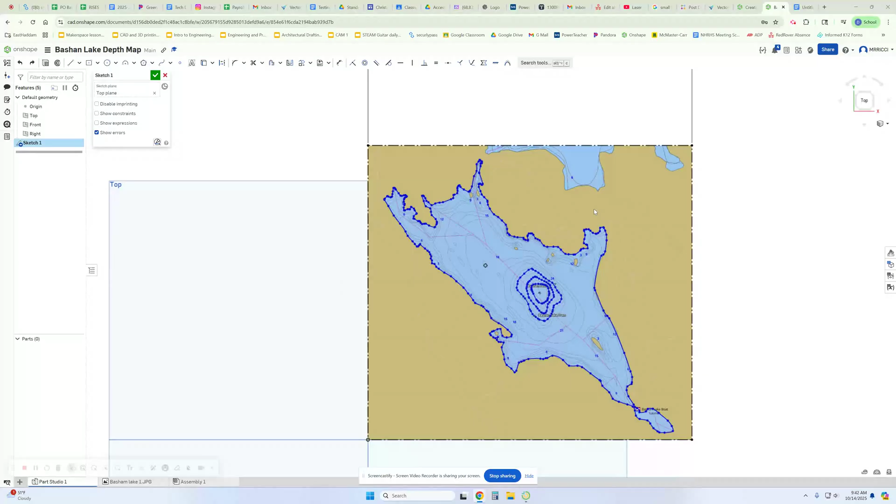But now for this video I'm going to show you how to turn this bathymetric lake map into an actual depth map, so that we have each depth on its own separate sheet of material, and then make sure they're all centered so they all line up like they're supposed to.

Alright, so what I did here is I traced the outside spline and I traced a few of the inside contours. You'll have to finish yours obviously, but I'm just trying to save a little bit of time, so I didn't do all of them.

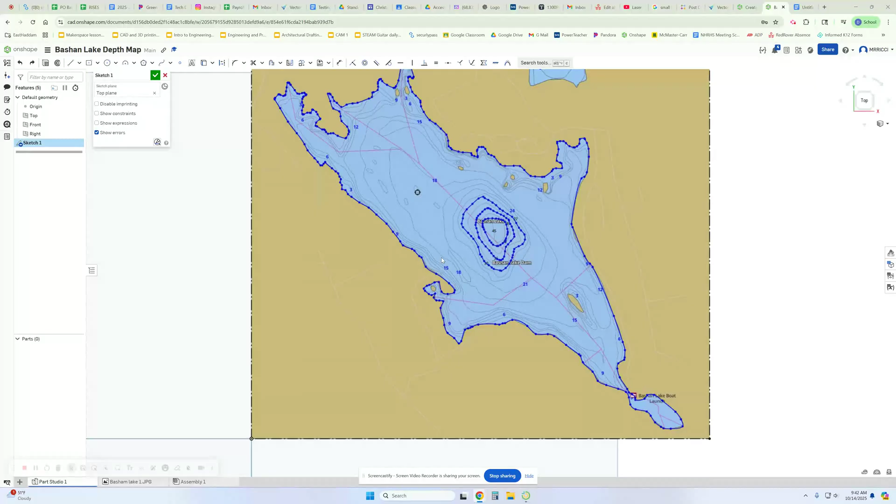But pick a certain depth that you want to go with, every 8, every 9, every 12, every 15, every 20 feet, depending on how deep your lake is.

And then you roughly want to be about 6 layers on this, so a bottom layer and then 5 or so upper layers. Make sure you don't have too many layers so we don't use too much material. So limit yourself to about 6 pieces of material. That'll come into play more, and I'll explain more about that in a little bit.

But what we want to do here is we want to first start by taking this map and scaling it correctly to our size. Our size for our material that I'm going to give you is 12 by 15 inches, and so I'm going to draw that here.

I'm going to take and click - oop, that's my center point. I want to do that - corner rectangle, and I want to draw that 12 by 15.

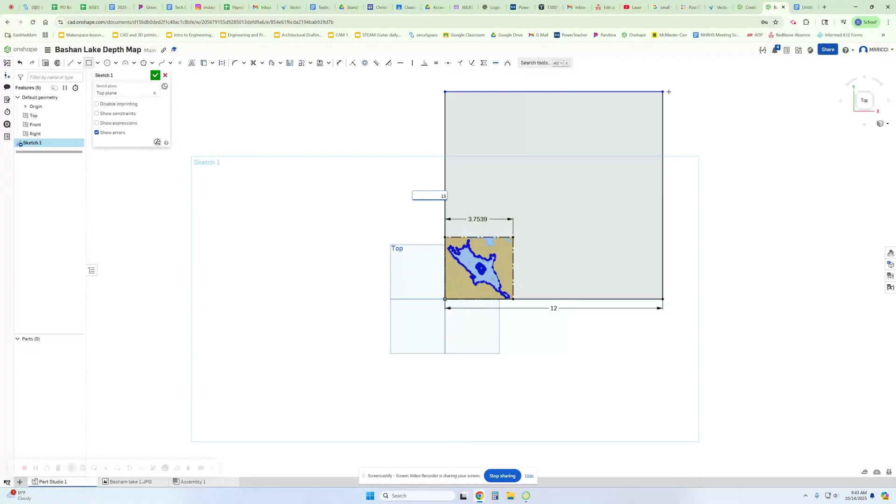So this is the size stock I'm giving you, but I don't want to make it to the exact extents of this stock. I want to make it a little bit smaller so that I can have a nice clean laser cut outline going around this.

And so I'm going to draw a line down the center, and then I'm going to click my center point rectangle so I can center a rectangle in this rectangle.

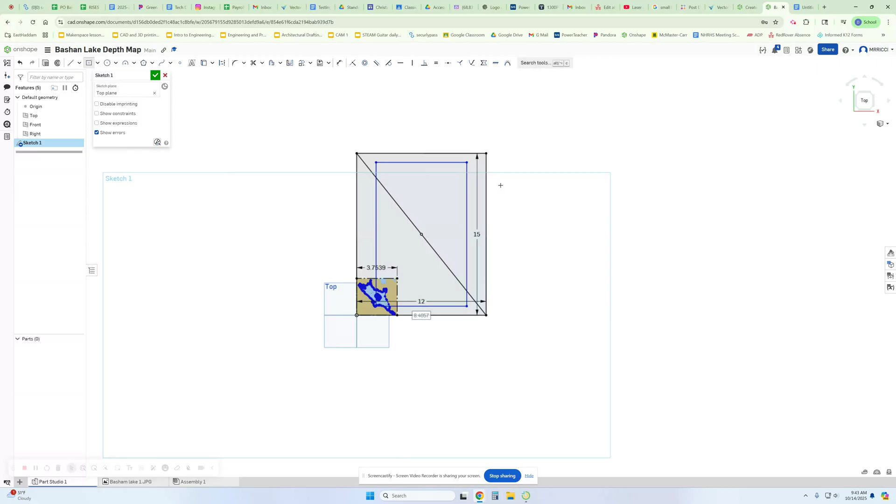This second rectangle is going to be 14.5 by 11.5. You can do whatever orientation you want. I'm choosing to go portrait here just because that's the way that I want this to go.

You do not need to use the full 11.5 by 14.5. You can make it smaller, but you can't make it any larger. This is the max, okay.

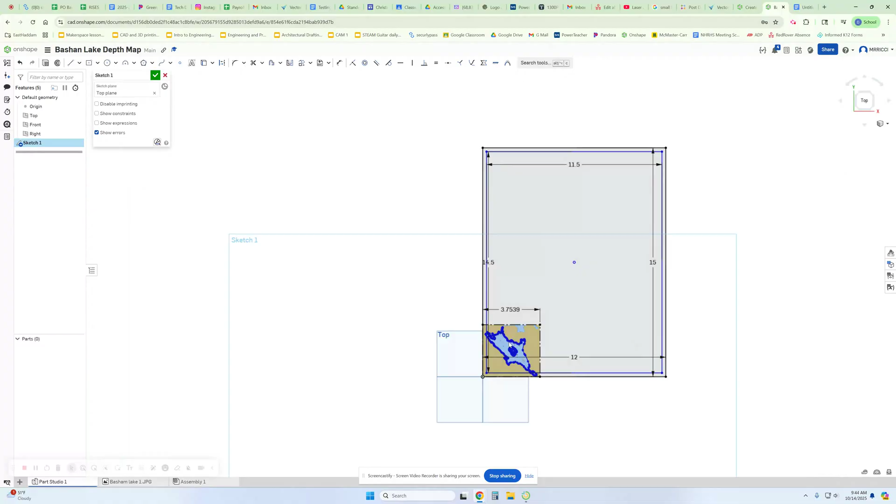I'm then going to delete this diagonal line. Next thing I want to do is I want to move this map to the inside of my stock here. So I'm going to take and drag the splines and the map up to this point, and to do that I'm going to use the transform command, which is in the linear patterns drop down.

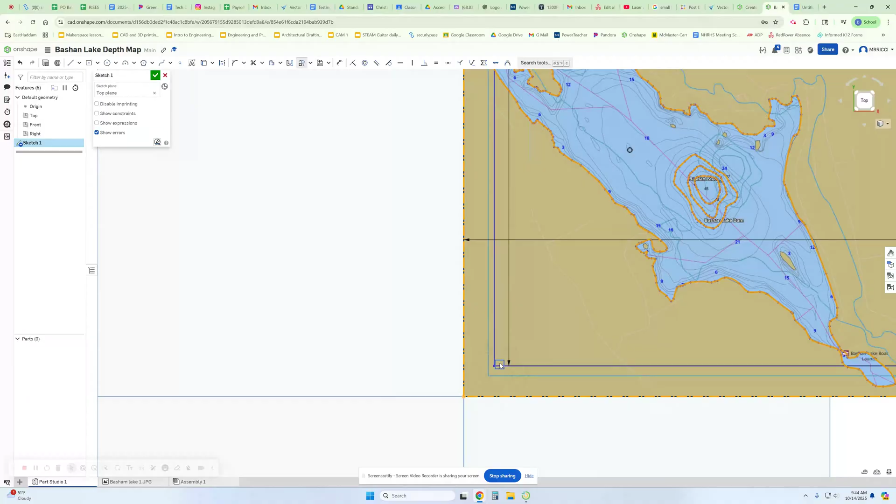So selecting transform, grabbing all the stuff I want to move, and then the transform will give you these options here to scale and to move. I'm going to take and grab this box here and just slide it to snap into this corner. And then once I click, it will move everything with the map and the splines.

Okay, I want to make this 3.7539 - I want to make that exactly 11.5 inches, so I need to figure out a ratio, exactly how much to scale this up.

Alright, so I wrote the ratio out here. It's 3.75387 over 1, because right now it's full size, so it's full scale. And I want to figure out how big to make it if it's 11.5 inches, so I'm solving for x. So cross multiply: 1 times 11.5, divided by our size here.

And so I'm going to get my calculator. So 11.5 times 1 is 11.5. And now I want to divide by 3.75387, and that equals 3.0635. Okay, so that's what I'm going to use for my scaling up, 3.0635.

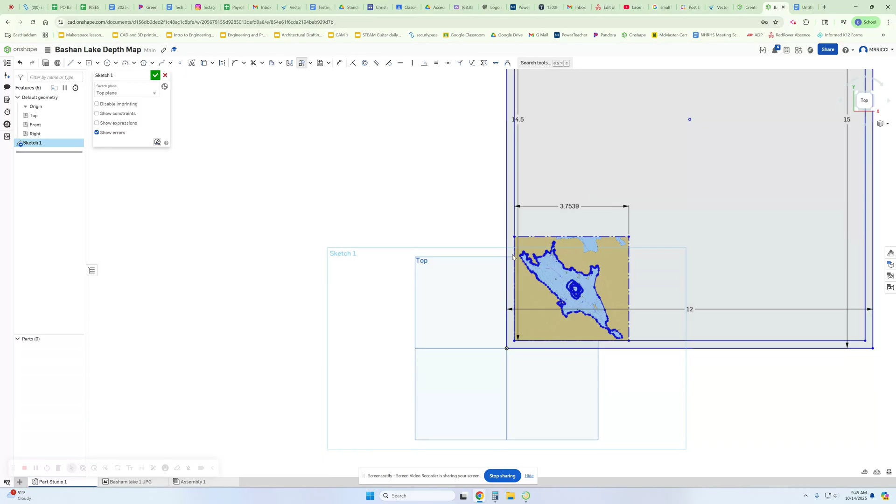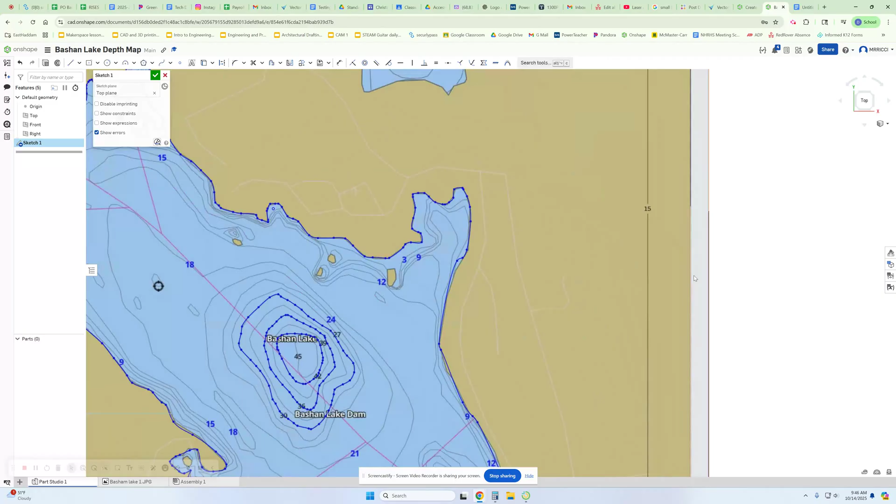So now when I'm doing the scaling up, I'm going to use the transform command again. I'm going to start scaling it by dragging this out, then click in here. 3.0635 is my size. Hit enter, click, and it moves the map to that size, making it exactly 11.5 inches.

I think what I'll do is keep this size and keep the map this size, and just add a label like Bashan Lake, East Haddam, Connecticut. So I want to move this up now, so I have room at the top and room at the bottom for my text.

Okay, another transform. I take and grab this - may have to deselect. I can type in an exact amount I want to move it, or I can eyeball it. I've got enough room up here to write Bashan Lake and enough room down here to write East Haddam, Connecticut, so I'll say okay to that. I'll move it up exactly 2 inches, so it's not just random. Okay, move it up 2 inches, say okay. And now it's moved in here.

I don't really need this map anymore. If I was done tracing it, I wouldn't need the map, so I'll delete that map out of there. Okay, so this is all we're going to need. I'll get rid of this line as well and redraw it down here.

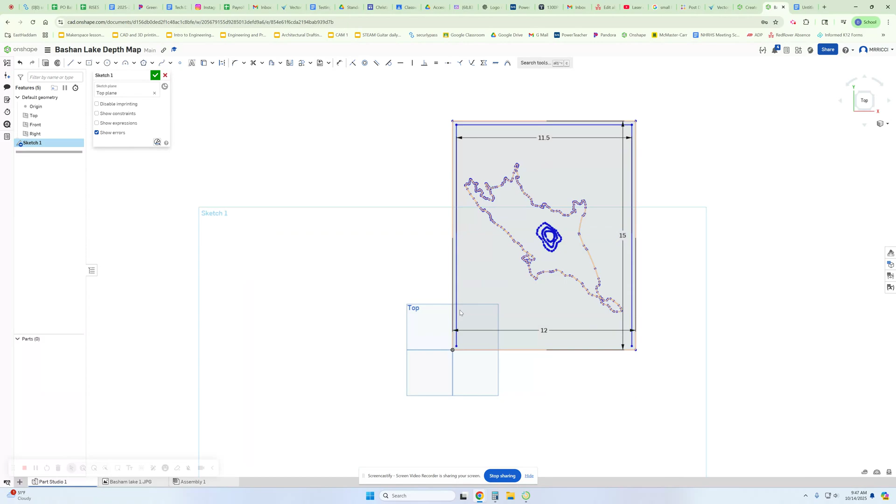Alright, so basically our outside box is our stock, our inside box is the actual size we're going to make this, and then I have my map here. So what you need to do is make a copy of this, of all of this, for every layer.

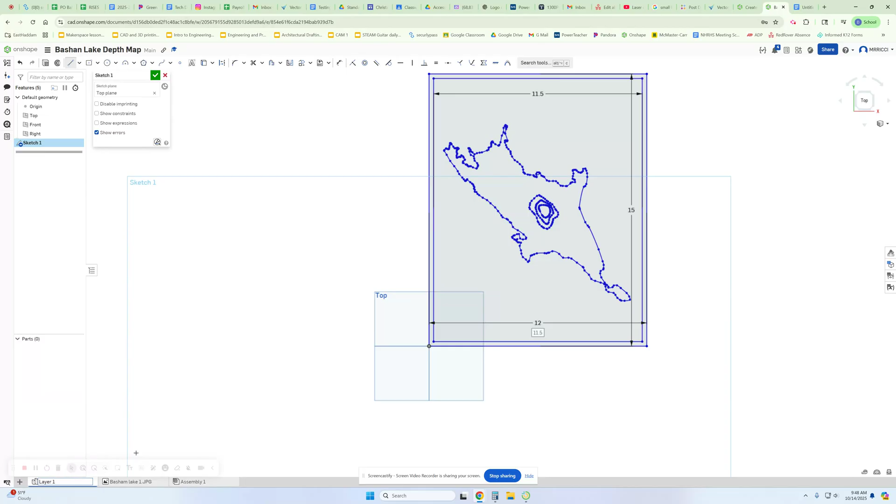The way I'm going to do that is come down here to Part Studio 1, rename it, and call it Layer 1. Then I want to right click on here and duplicate, which makes Layer 1 copy 1. I'm going to duplicate that again, and just keep going through here, duplicating this for every copy I need, and then go back and rename them.

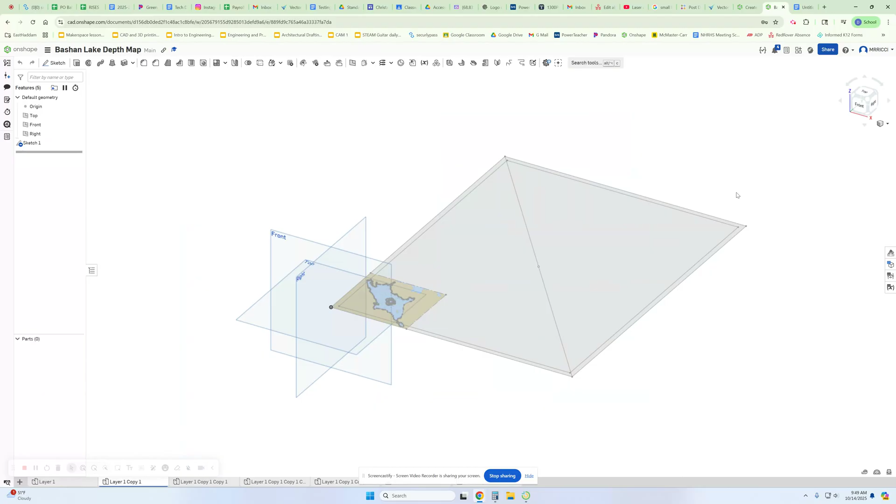Okay, so Layer 1 is this, Layer 2. What I think I have to do is say okay to that sketch. And now if I go here - I didn't make a copy of it because I copied it before I approved the sketch. Okay, so live and learn.

So I'm going to delete these. Let's just do a check here - duplicate this. Yeah, that's better. So make sure you approve the sketch, say okay before you make your copies. So I've got to go here and delete all these extra copies.

Just the little things. Now I'm going to duplicate these for each one. Doesn't matter which ones you duplicate because they're all exactly the same - I'm just clicking on any of them here and duplicating them. So now if I go back through and check any of these layers, they're all exactly the same.

So Layer 1 will be the bottom layer. On the bottom layer, the only thing I need is an engraving of this bottom piece. So I'll go into the sketch and delete everything I don't need.

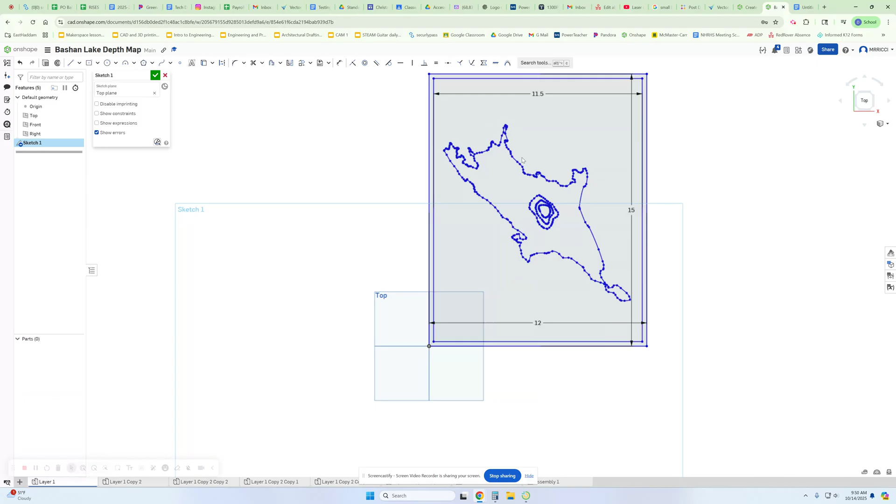So clicking on this spline and deleting it. There it is - click on the spline, delete it. Click on the spline, delete it. Click on the spline and delete it. Okay, so that's going to cut this out, and it's going to cut this part out, so you're going to see through to the bottom layer.

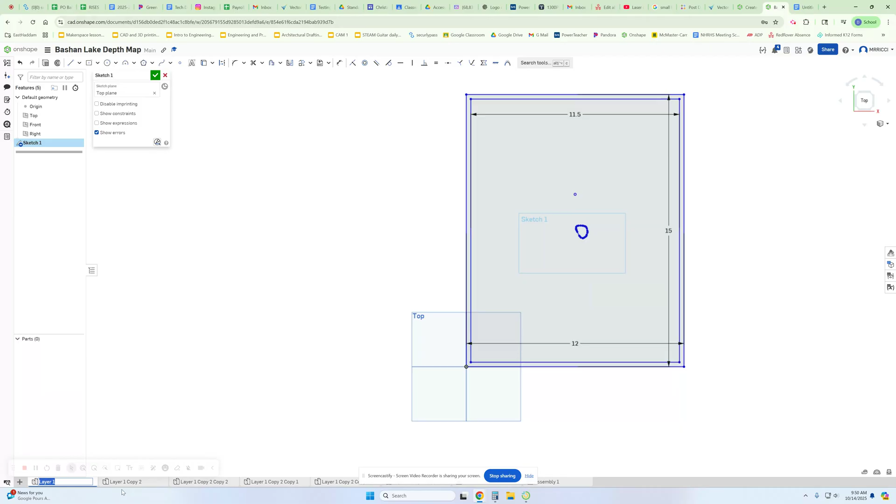So I'm going to call this layer right here Layer 1, rename to Layer 1. It already is. I'm going to take this layer here, open this up, open the sketch, go to my top view. I'm going to delete.

Oops, there we go - click on the spline. There we go, delete. Delete, delete, delete - so I'm erasing everything. Now I just have an 11.5 by 15 that it's cutting out. I need a back, so I'm going to rename this to my back.

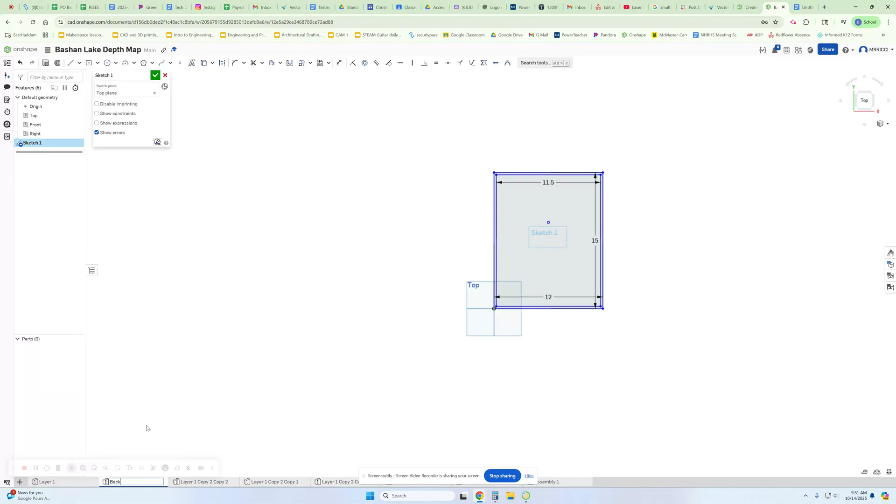Alright, I'm going to take this layer here, and this is going to be layer 2. So I'm going to go to my top, open up the sketch, and I'm just deleting, delete, delete, and you can get rid of this too.

You can leave this, but it's going to be extra cutting, so now it's going to cut that out. So now this, rename it, layer 2. I'm going to put my back down once it gets cut out, then put layer 1 down, and they're all going to line up along the outside because they're all exactly in the same location and exactly the same size.

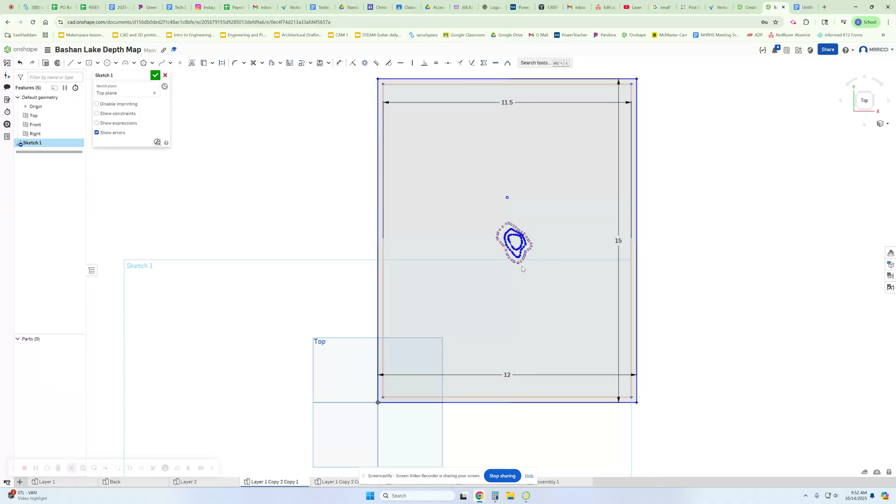So the back is down, then I'm going to put layer 1, then layer 2, then layer 3, which again, if I go to my sketch, top view, I'm going to get rid of, I can get rid of the inside. So this is layer 3, rename this. Alright, it's just doing that for as many layers as you have.

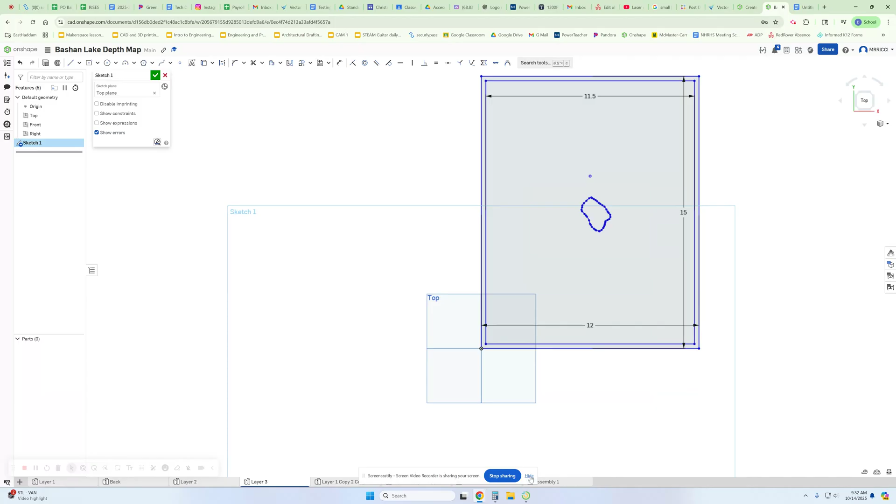So I have a back, and right now I have 4. I'm going to do one more here because that's all I have. Open that up. And now what I'm going to do is delete all of this. And this would be layer 4.

Again, I know I missed a lot of them. I would have layers 4, 5, and 6 here if I had more, but I'm just going to rename this as layer 4, or top layer.

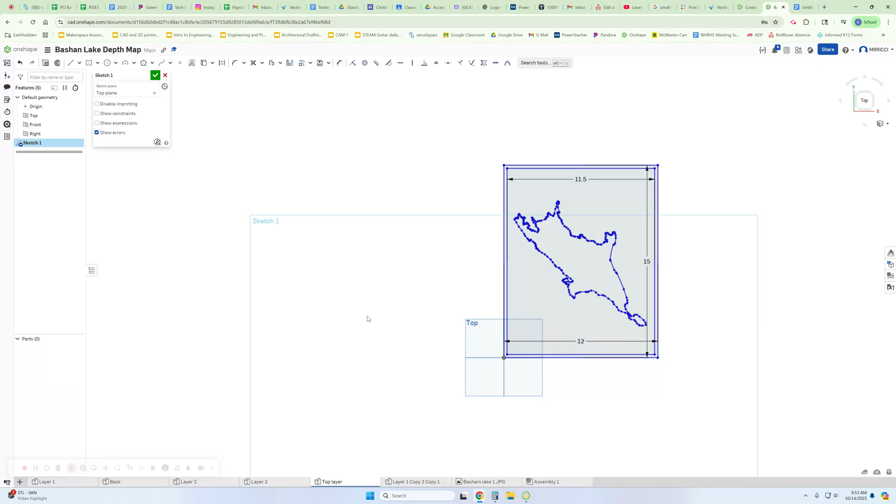On the top layer, if you wanted to have other things, you would have to put those in. Likely going to have islands in here, so I would have to. It's usually shallow right around the island, so I'd have to trace my islands, which I forgot to do on this one. I also need to add, if I'm going to put any roads in, I would want to trace those roads for the top.

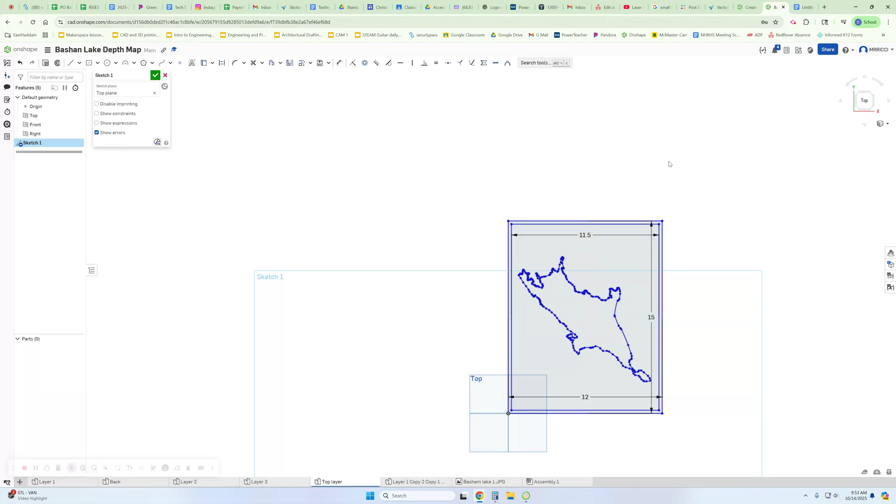And this top layer, I'm also going to have any font or wording that I want. So I would go in here and type in what I want. You can do the typing in Corel, which is going to be our next software that we use to bring this in and control the laser. Corel does a lot better job with fonts and has a lot more options, so I will show you that when we bring it into Corel to laser cut it.

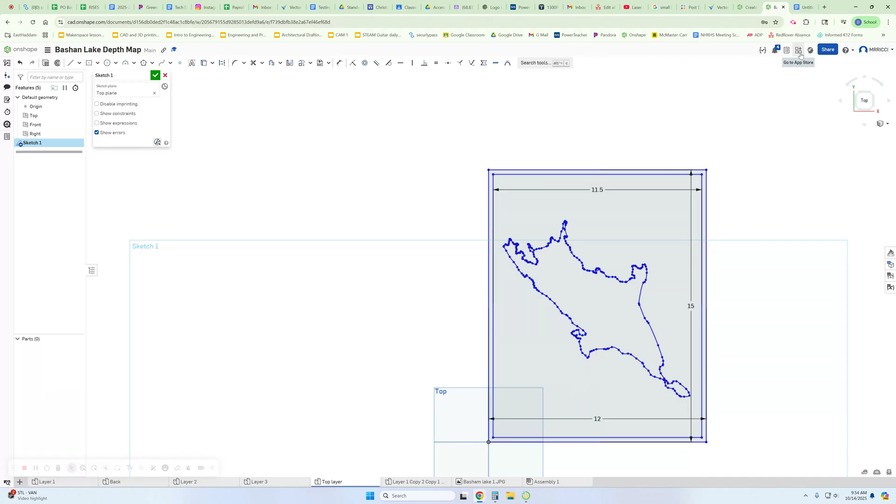But you need a back, then you need layers 1, 2, 3, 4, 5, and 6 if you have up to 6. And then what you need to do is export each of those as a DXF. Once I have all these done, I'm going to say OK, and approve each one of these sketches, make sure it's good to go.

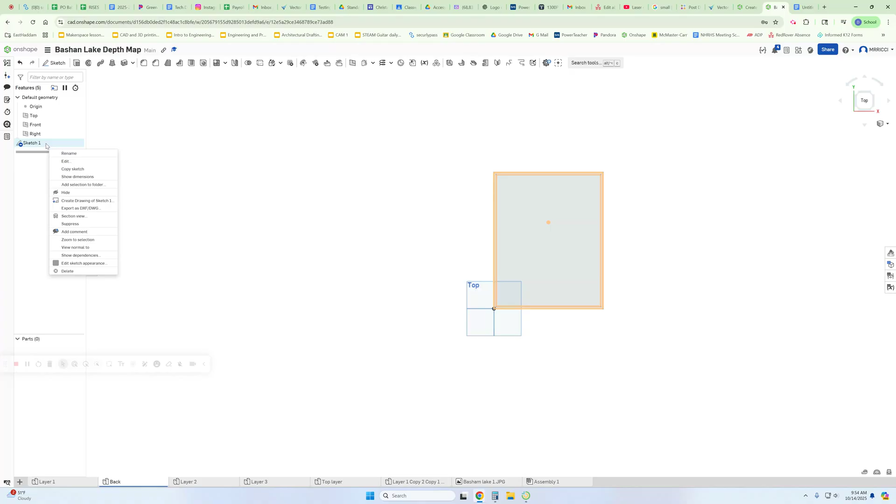And then I'm going to right click and export. This is getting in my way. Export. Oops, nope, sorry, at the sketch, right click, export, DXF. So I want to say back.

I'm going to call this Bashan Lake back, and I'm going to say export. It's going to go into my downloads. Then I'm going to go to layer 1, right click on the sketch, export. I'm going to say Bashan Lake layer 1. Make sure you're naming everything so you know what it is and how to deal with it. So export there.

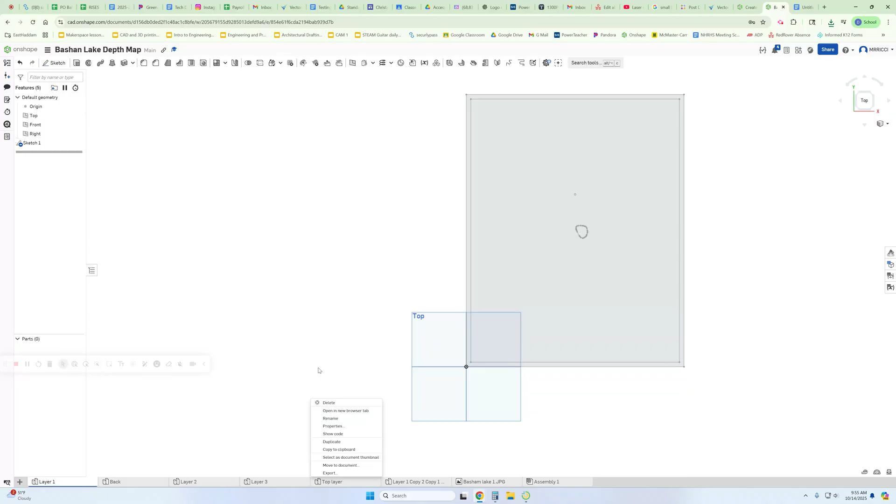And then I'm just going to do the top layer as well, and then I'm going to show you what I'm going to do with these. So I'm going to go open up my top layer, export, Bashan Lake. Okay, so I'm exporting these as DXFs.

And then what I'm going to do next is I'm going to open up CorelDRAW. Just say skip this part. I had a power outage over the weekend, so all my software crashed when the power went out.

Alright, so now that I'm in Corel, I'm going to go to a new document. The document has to be 37.795 by 24.016 — that's the size of our laser, so we're going to say OK to that. I'm going to call this Bashan Lake map. Okay, I'll say OK.

Now I need to have a different cutout for each one of these, so you're doing this for each one of your layers. Alright, so I'm going to do File, Open, go to my downloads. I'm going to make sure I'm selecting for DXFs.